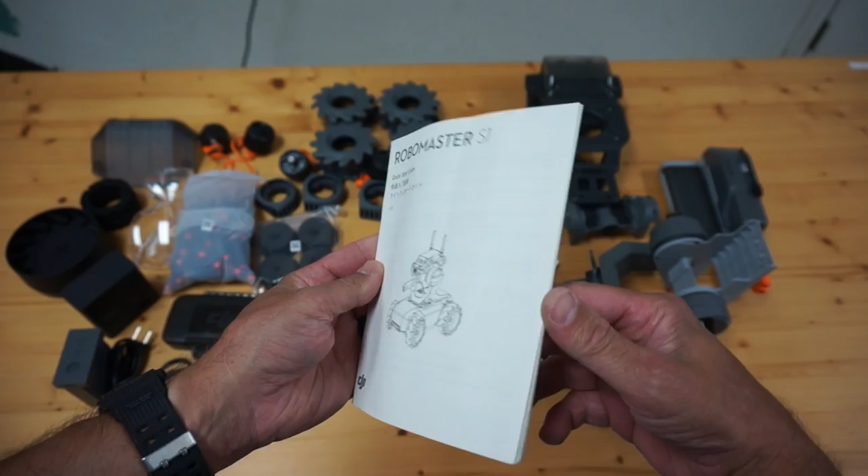We're going to go through the assembly using this RoboMaster S1 book. There are actually 72 steps, I believe, maybe 73. We'll see how that goes, but let's go ahead and begin the build.

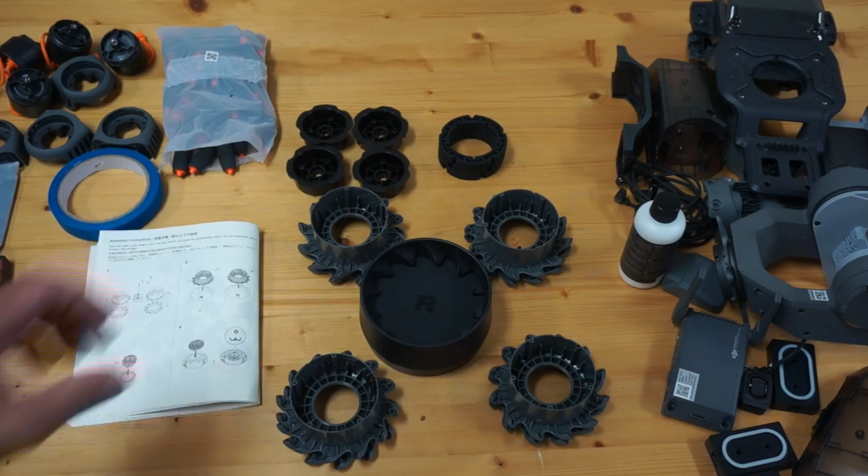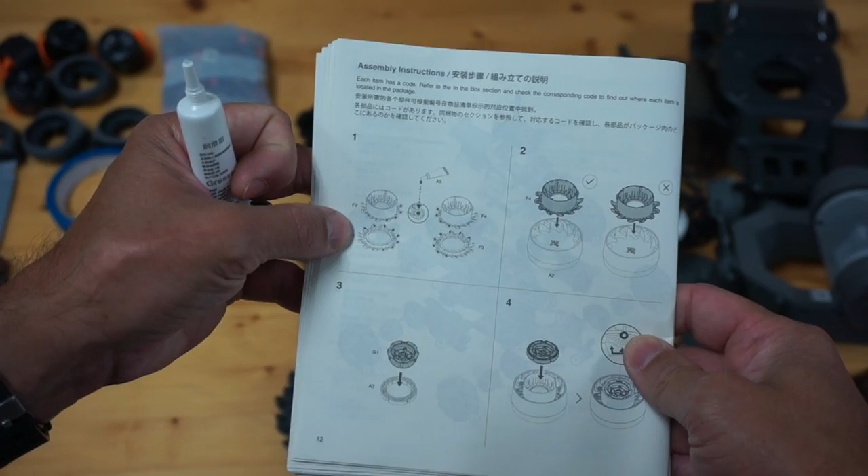The first part of this assembly is focused on the wheels—steps 1 through probably 12 or so pertain to wheel assemblies. For the sake of not being redundant, I'll just focus on the left and right wheels. This is a left rotating wheel and this is a right rotating wheel. For each wheel there's an inner and an outer hub. Step 1 is focused on putting grease in each one of these hubs. There are a lot of little holes, and the wheel rollers, which are essentially like bearings, will go in. We want just a little bit of grease in each hole.

Okay, so I have everything greased up—you might be able to see a little bit of grease in each one of these holes. There are, I believe, 12 holes per hub. Each wheel has 24, and if you do all 4 wheels, that's 96 little dabs of grease you'll need to do. That's step 1, and it should take anywhere from 5 to 10 minutes.

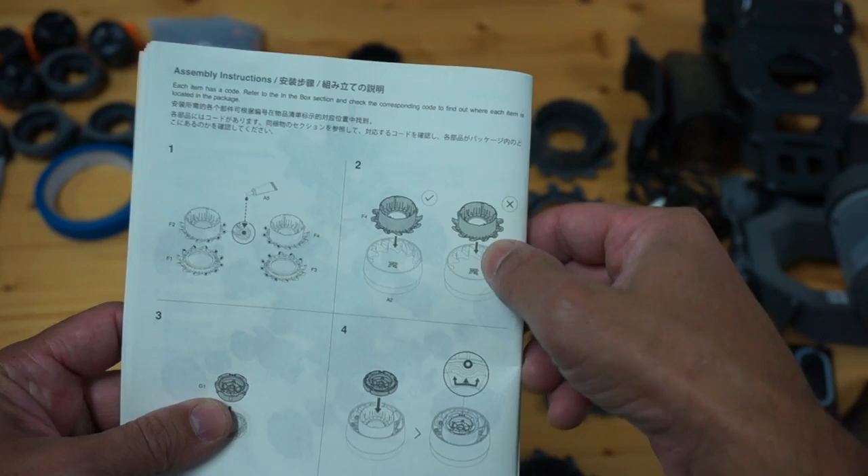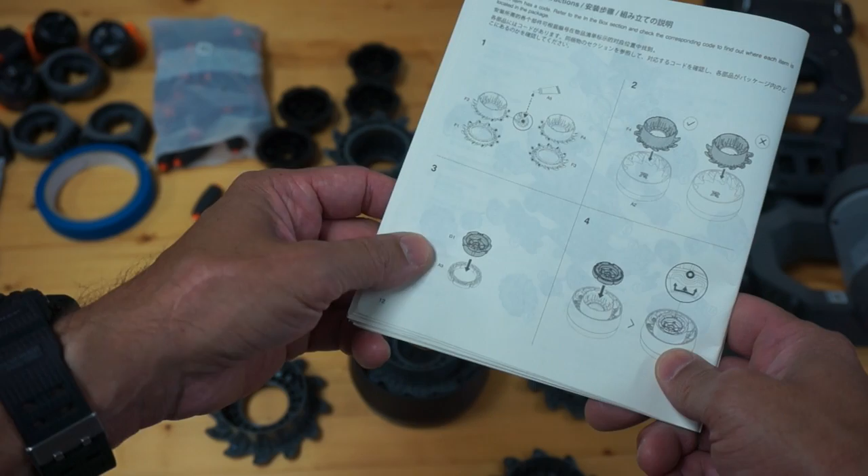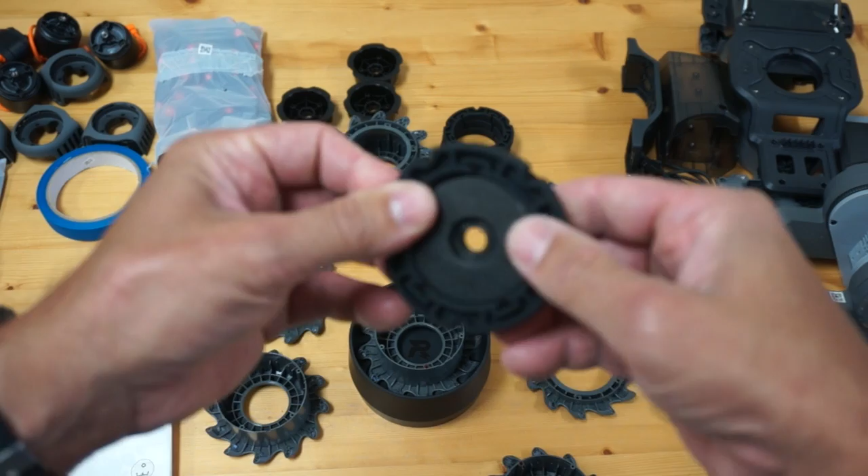Step 2 has us inserting one of the hubs inside this container, which will help us build the wheel a lot easier—that's the left side, that's the right. I'll go ahead and grab the right outer hub. That's done. Next, in step 3, we get what I believe is sort of a damping system—there's this rubber O-ring that goes with the hub. I'll grab one of these and one of the rubber gaskets or O-rings and slide that on. It looks like there's a certain way to slide those on—you can see the little notches there.

Now step 4 has a bit of a callout here. If we take a look at our hub, there's a red dot right here, and when I put this in, we can see this arrow symbol. So we want to make sure that arrow lines up with the red hole.

You can see all of these others are not colored, but this one is red. So that will complete step 4 for this right wheel.

We're going to go ahead and insert our wheel rollers. Now that's where the grease comes in handy. If you look at these rollers, there's little pegs on each end. So what I'll do is set one in, and we'll go all the way around the hub and insert those.

Okay, so we have this first right wheel with all of the rollers installed. I believe there are 12. So we'll go on to, I believe, step 6, and that shows that we're going to put the other side of the hub on.

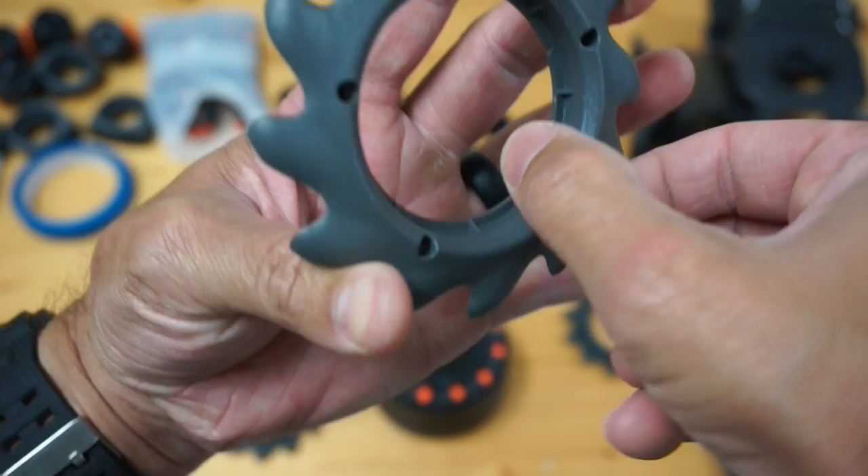So I'll go ahead and grab one of these right hubs. Once again, I've gone ahead and greased that up. And there is another call out in the instruction sheet. If we take a look, you'll see a little bit of a notch at the top, that little triangle. So what we're going to do is line that up with the red dot. We put that O-ring with that arrow lining up with the red dot.

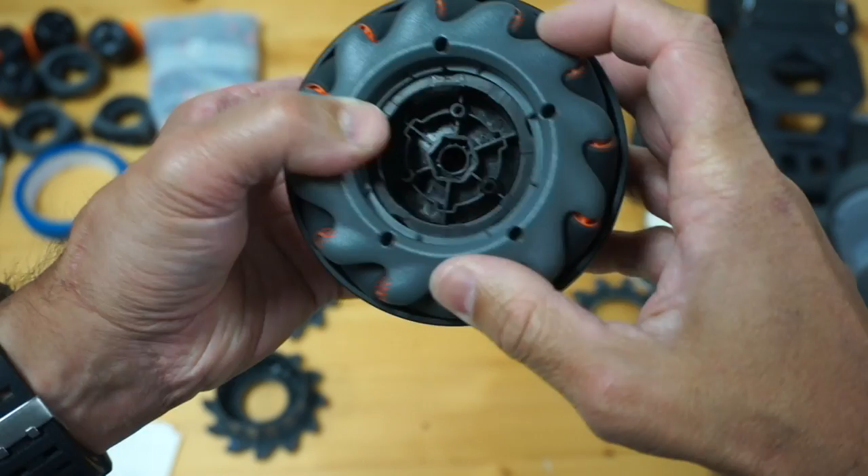And now I've gone ahead and lined that notch up so that all of the wheel rollers are inserted, ready to go for this right wheel. And then what we'll do next is actually put these screws in.

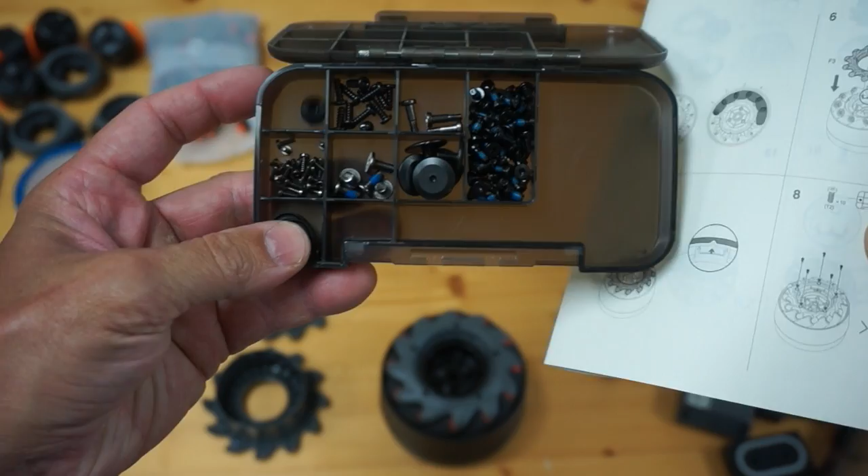So step 8 has us getting these T2 screws out of here. See our screw container. If we look at the actual instructions, it actually shows us which compartment within this container to use. So this compartment, I believe we're going to use 5 of these for this right wheel, so I'll go ahead and put those in.

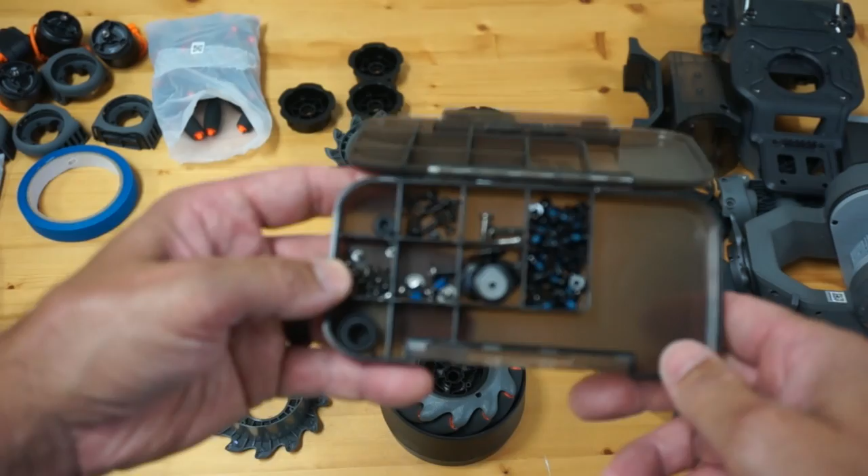Okay, I have everything screwed in. Let me share an added plus: this DJI screwdriver is magnetized, which is incredibly helpful. And I've gone ahead and added the 5 screws in here.

Pull out this wheel. Once again, this is the right wheel. And what we'll do next is we can flip this over. This side with the R, the RoboMaster logo, is for the right wheel, and we'll flip it over. And then I'll do the left wheel.

Our wheel assembly is complete. We have 4 mecanum wheels. Now, if you're not familiar with this design, it's very common in robotics. These wheels will allow us to move in an omnidirectional manner where we can move sideways, forwards, backwards. They're actually really cool. And just as a side note, we have some extra rollers. So I was concerned at first that I didn't have all of them inserted, but DJI provides a couple extra.

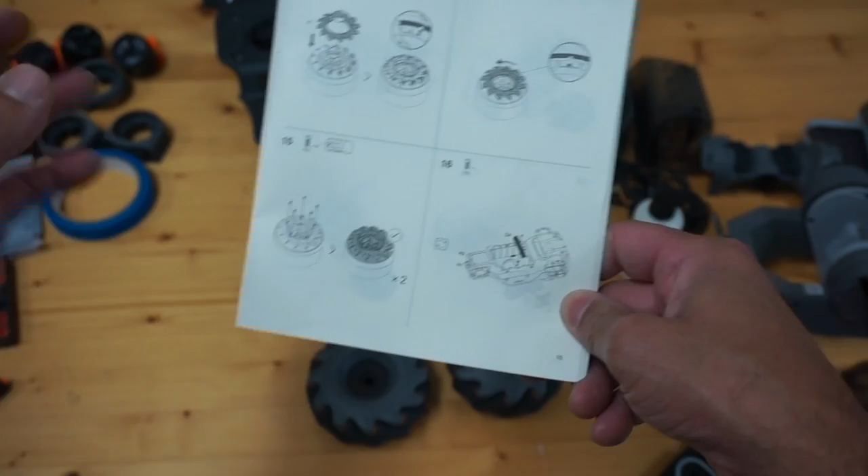That covers the first 15 steps. That might take you 30 to 45 minutes to assemble the wheels. And next it looks like we're going on to doing some frame or chassis assembly.

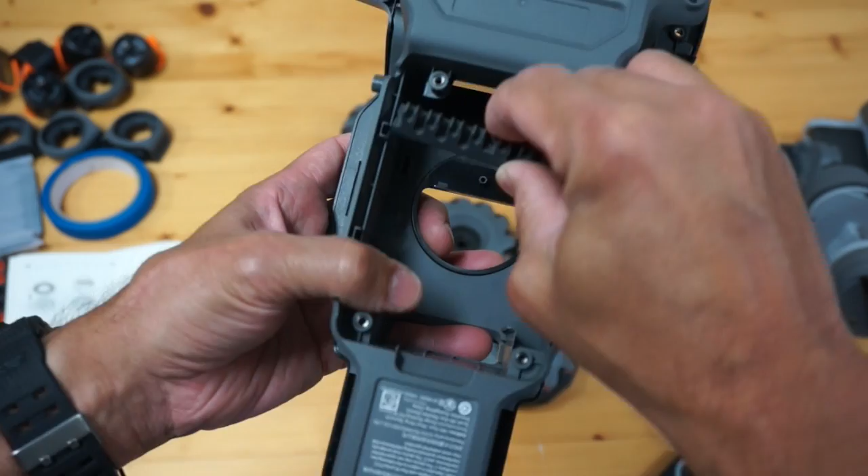So step 16 looks like we're just inserting a cable tray inside the bottom of this chassis. So I'll go ahead and take this tray. It's going to just slide right in and then snap into place. We'll put a little screw in there, a T2.

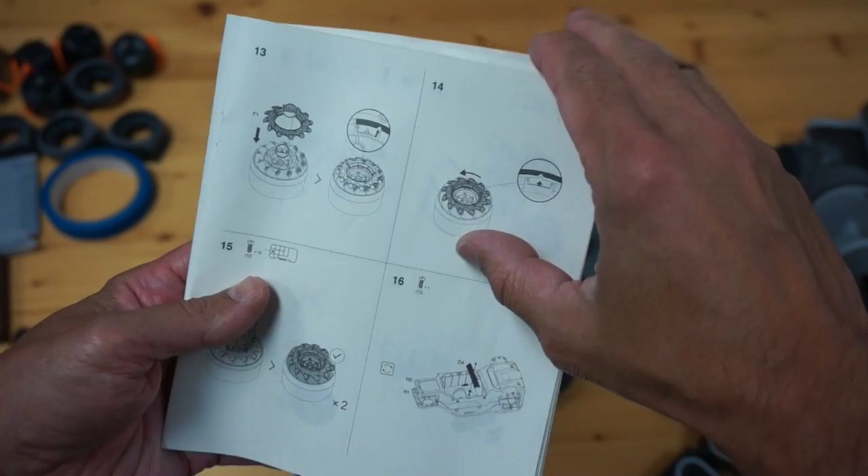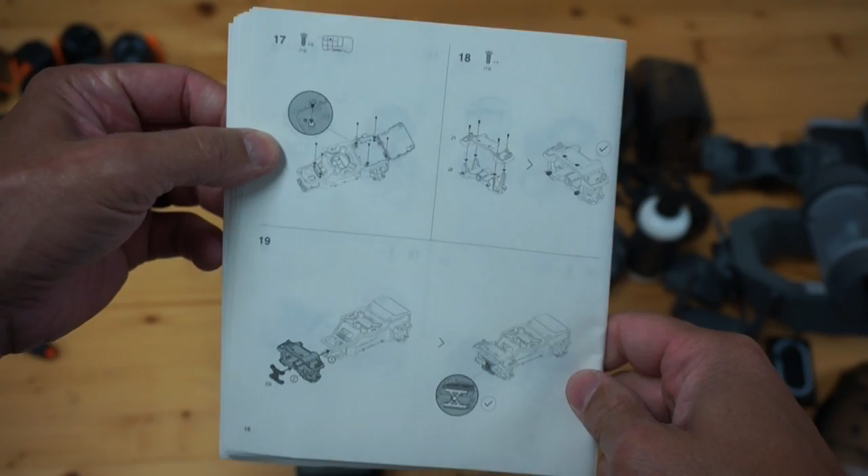Okay, step 16 is complete, and if you haven't already noticed, these instructions are very similar to what you'd see from IKEA, which we've all probably had our frustrations with, but so far these DJI graphical instructions have served me well. So it looks like step 17, we're going to be putting 6 screws in this chassis assembly.

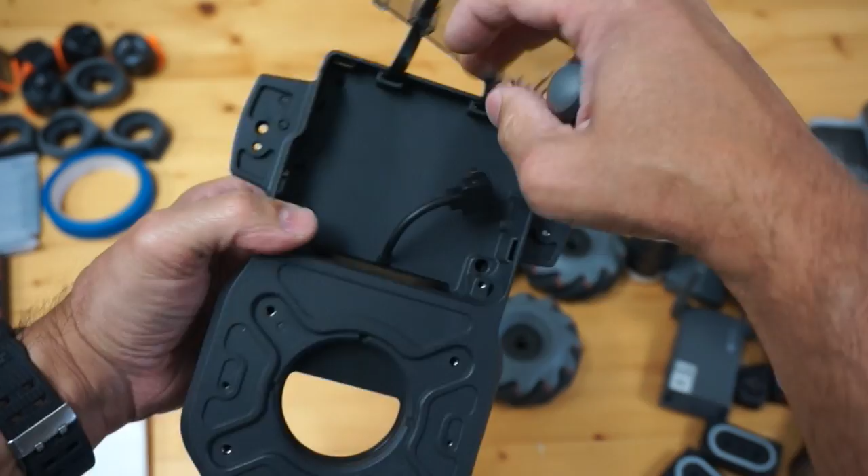See here that it's not completely assembled yet, so we'll snap those together and put in these 6 screws.

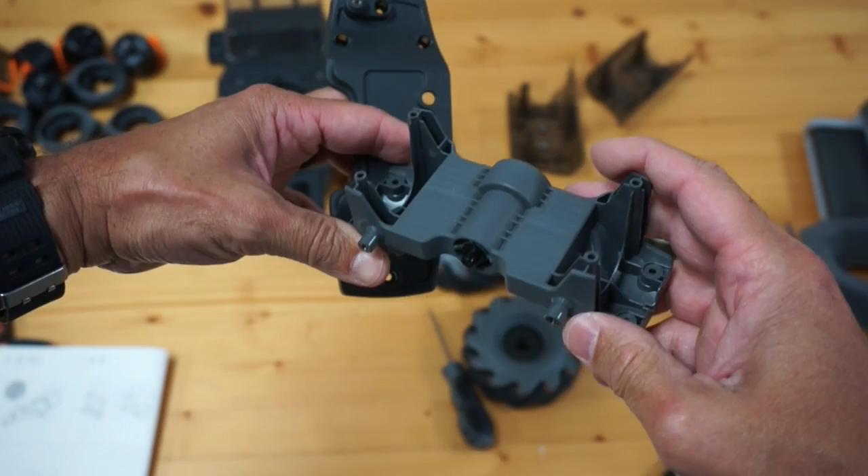Okay, moving on to step 18. This is the front axle assembly. So we're going to be screwing those 2 pieces together. I want to make sure I can tell by the drawing that we want these 2 knobs sticking out, and then we want these 2 threaded holes in the back. So we're going to assemble it this way, using these 4 T3 screws to assemble it.

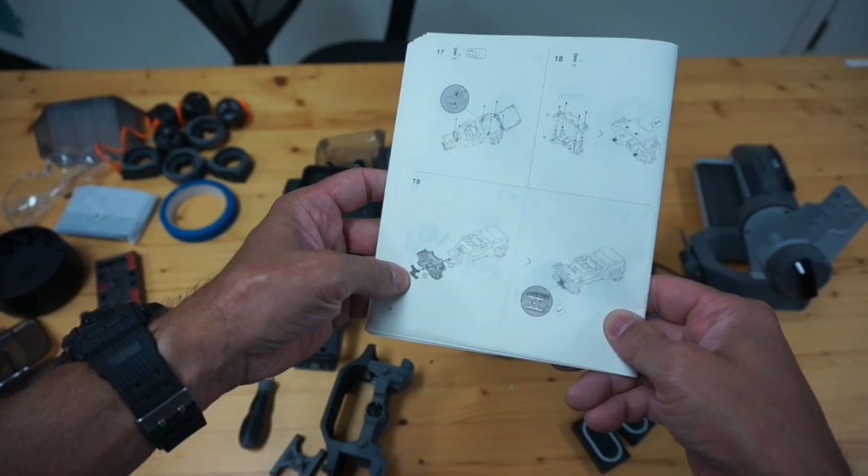Steps 19 and 20 consist of taking that front axle assembly we just put together, this middle chassis, and this piece to hold it together. So what we'll do is, looks like, see this hole down here? You can see part of this axle sticking out, so we're just going to make sure we insert it in there.

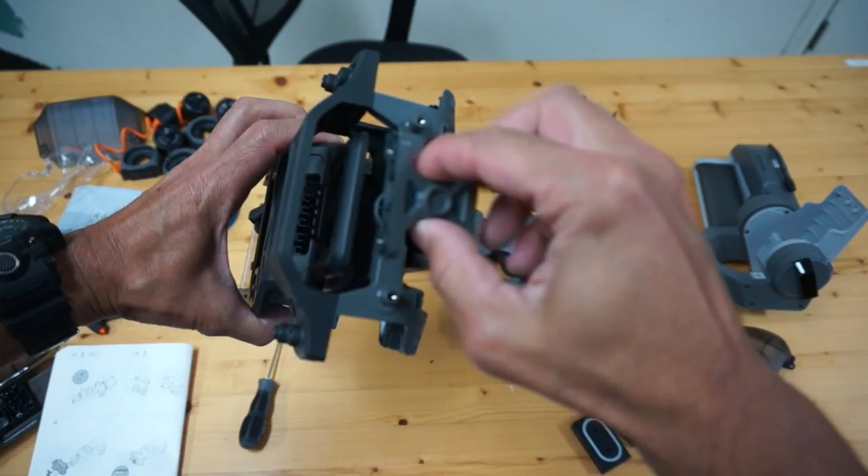And then we're going to take this last piece that looks like an X. We're going to slide it in here. You see this hole? It's going to go on the other side of this axle. It should just hopefully snap into place. Okay, now what we'll do is we'll go ahead and add the screws.

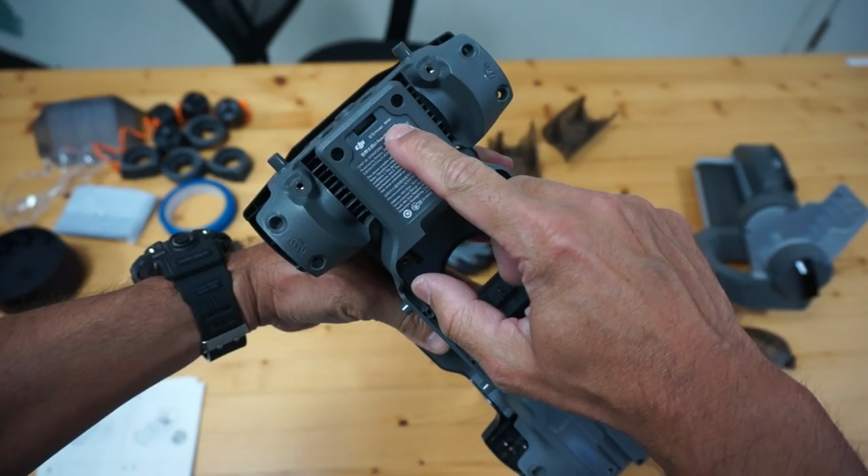So our front axle assembly is installed. Let me just make a side note to be careful not to over tighten. This is all plastic, so you don't want to get too tight. Just get it to where you can feel a good bit of resistance, to where it almost stops, and then just leave it there.

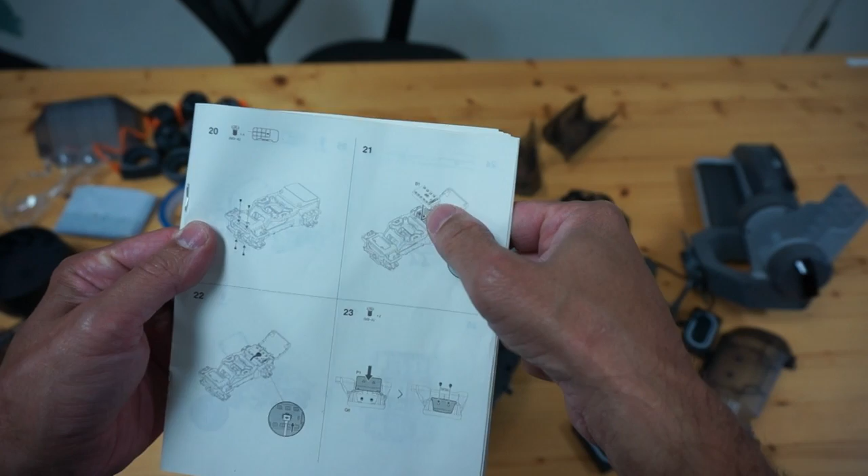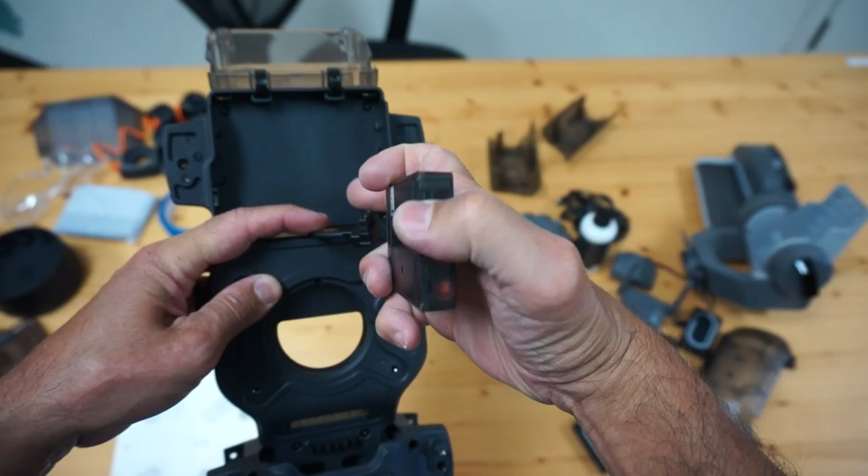Okay, so now we're moving on to step 21. Looks like there's a nice, for lack of a better term, power distribution board where we're going to plug everything in. So it looks like we're just going to snap it into place in the chassis. So I'll go ahead and grab this. Looks like this is going to go on my right side. If you look underneath, there's these notches here, and down here there are notches as well, so should be able to just hopefully click this into place.

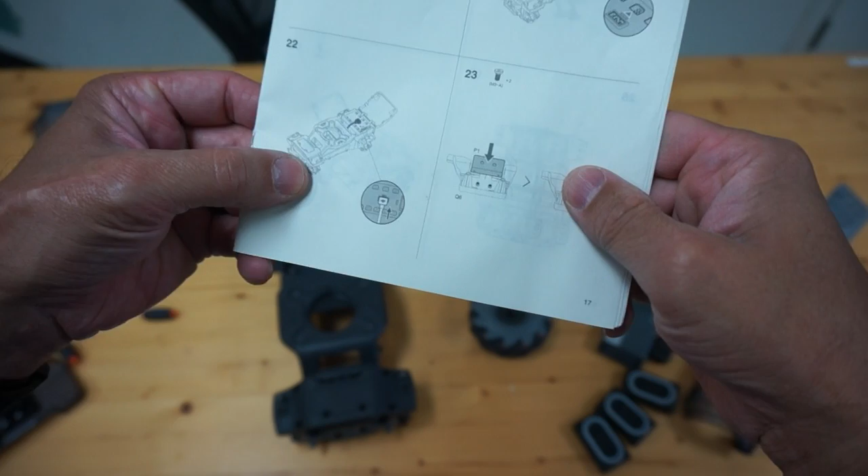And it looks like step 22 is just connecting our main power from the distribution board to the rest of the robot. So go ahead and take this connector and plug it in.

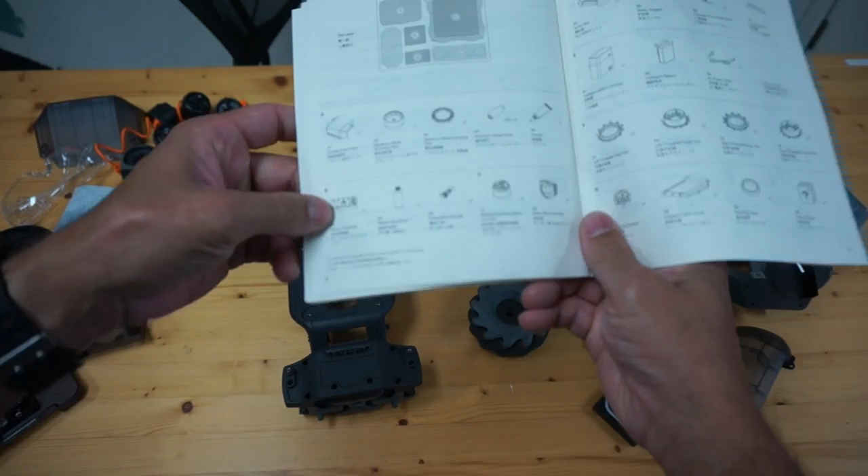Let me make a quick correction as it relates to this component right here. I was actually looking in the manual. You can see all of these components are labeled. That's not a PDB. It does handle power distribution, but DJI calls it the motion controller. So that's just for reference.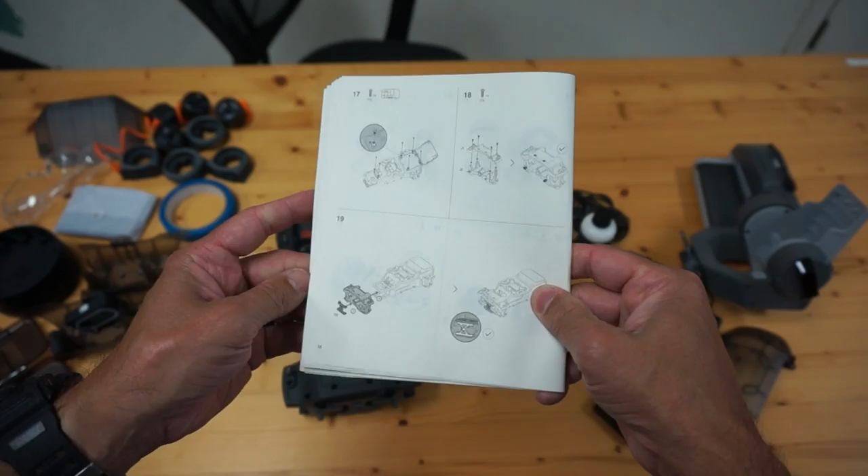Okay, let's move on to step 23. It looks like this is, they call it, the left armor for the chassis and a hit detector. This RoboMaster S1 comes with 4 hit detectors, and this is the left armor. So what we'll do is, you can see these cutouts, we're going to slide this in so that we can run our cables into it. That snaps into place, but it also looks like we're going to add 2 M3 screws to this.

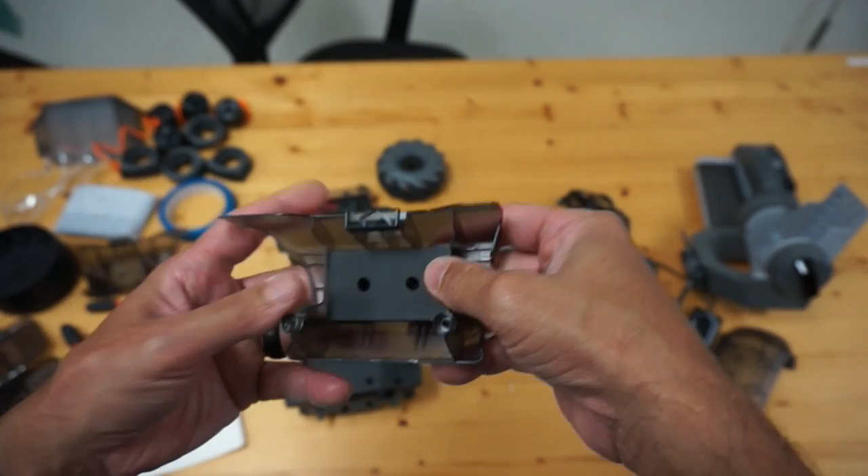Okay, now step 24, it looks like we're going to do some wiring of that hit detector. It says we're going to use this, quantity of 1. You can see there are 3 different lengths—a short, a medium, and a long cable that comes with the kit. So looks like we're going to use the medium. I'll go ahead and pick this middle one out, and we're going to go ahead and plug it into this side of the hit detector.

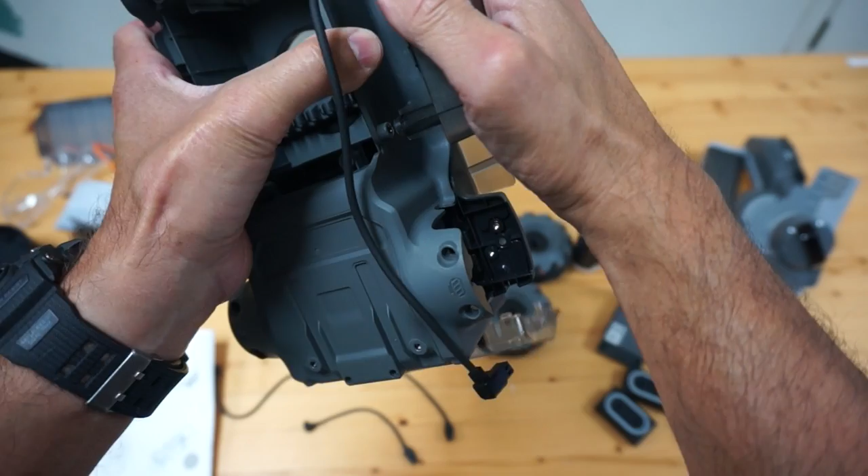Looks like in step 25, let me flip this over. Looks like there's this notch up here. Go ahead and click that in, snap that into place, and it shows in step 26 running our cable through this notch. So we have this little notch here, which is handy. Go ahead and run it through there, and then I believe we'll just feed it through here to the top.

And now I see where this cable retainer or tray comes in handy. I'll just snap that into place, flip it over, and it shows in the diagram that we want to go into this port—it's CAN bus. So good length, not too much slack.

Okay, now it looks like we're going to do the other side. So I'll go ahead and grab one of these hit detectors, go ahead and snap it into place, screw this in. I'll go ahead and grab my other medium length cable, plug it in here, snap that into place. Make sure the cable's on the outside of this, where that screw goes in, and snap that into place.

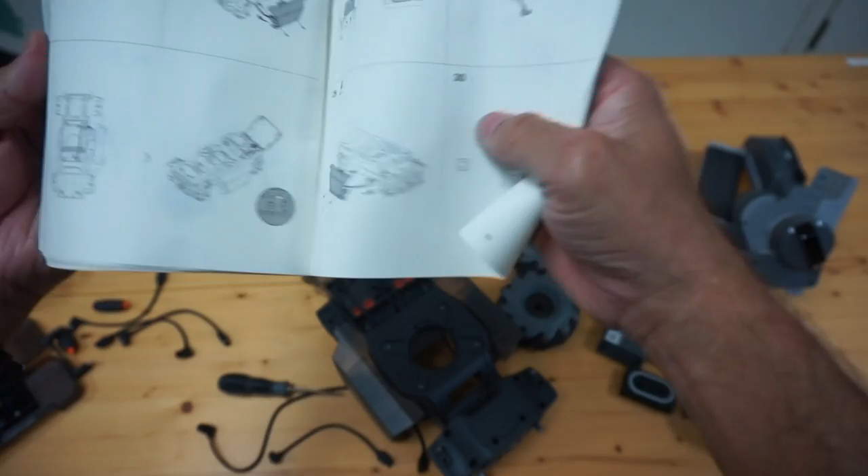Feed it up through to the top compartment, and let's see where this needs to go. Step 31, so it shows us in the top left. Go ahead and run this right here. And let me just double check to make sure that I have both plugged into the right place. Shows us here, right here for the left side and here for the right side. So everything looks good so far.

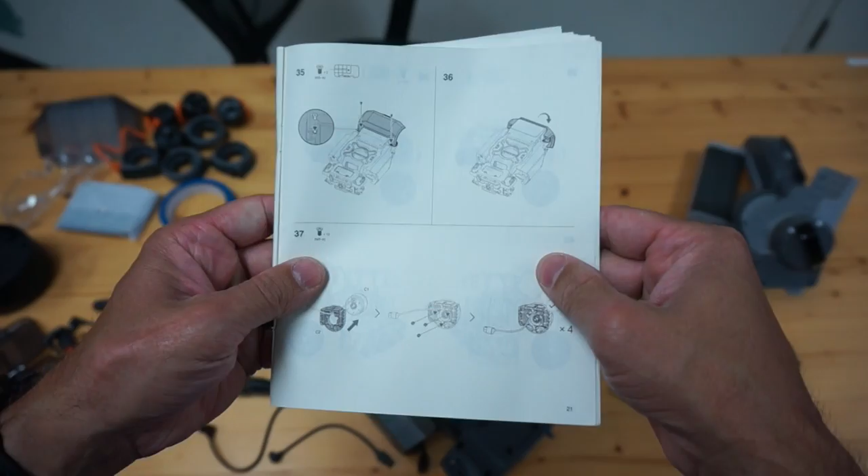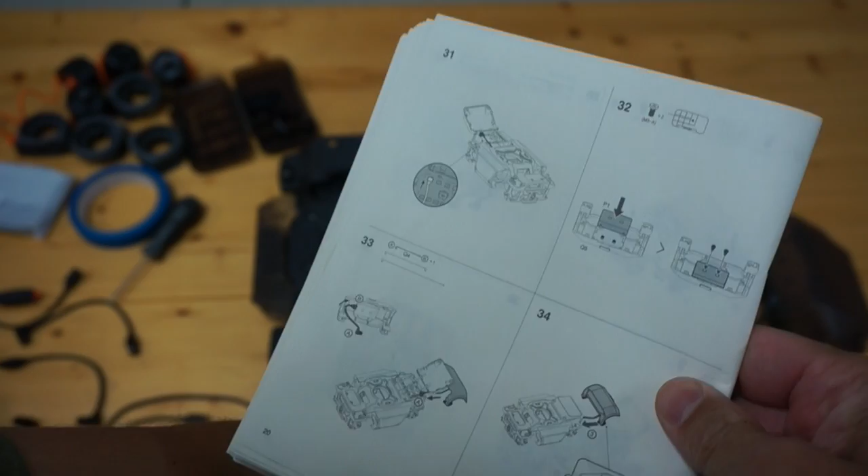Let's move on to step 32, but let me mention real quick—I forgot to mention this in the previous section—that I did screw this chassis armor in place. I forgot to do that, so just added 2 screws here and 2 on this side. Now we're going to go to step 32, and we're going to put a hit detector on the rear chassis armor. So that's this piece here, and as with the other pieces, we're going to go ahead and just snap that into place.

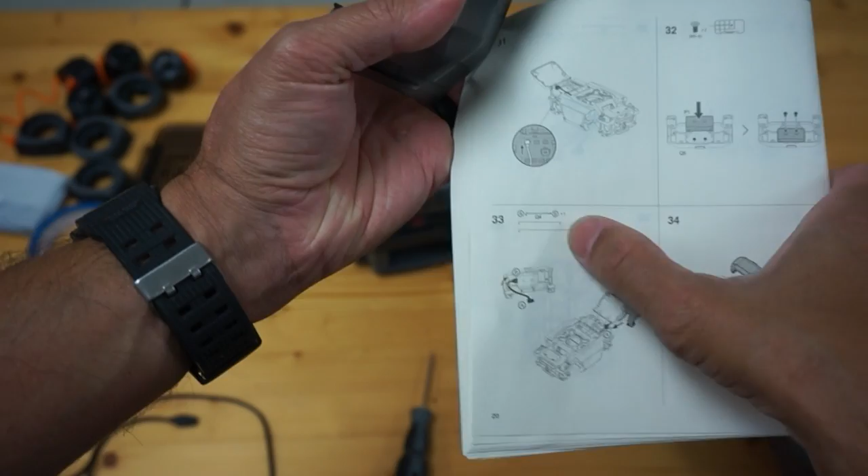I'll go ahead and screw this in. It shows that in step 33 we're going to wire this up, using one of the short cables. Let me grab one of those. It looks like we attach that to this left side here.

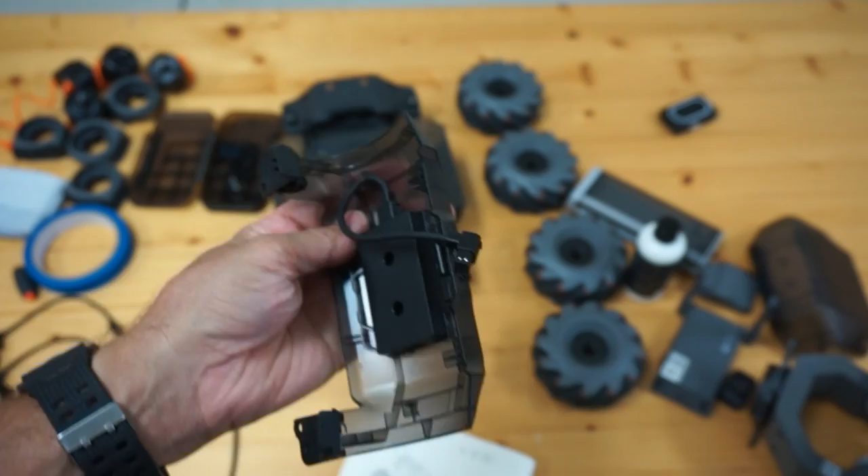Step 34 has us running this cable from the hit detector. We'll go ahead and clamp it in using this built-in clamp. Now we're clamped, and we're going to go into this plug here. According to step 35, we'll mount these screws in. Let me go ahead and close this.

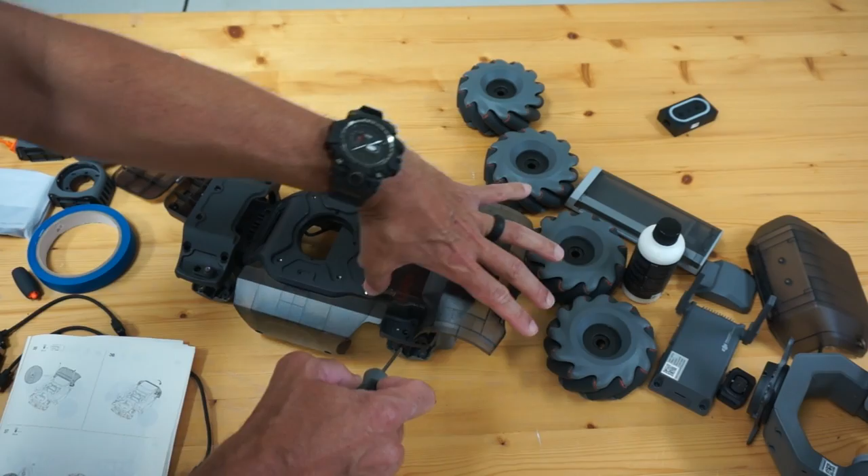You can see that this cable is going to run through this slot right here, so make sure we go over that. Once we mount that, we'll be able to use it since this is spring loaded, it'll go back and forth. I'm going to put that in place and grab a couple of these M3 screws. Rear armor's in place, now we can just snap it down.

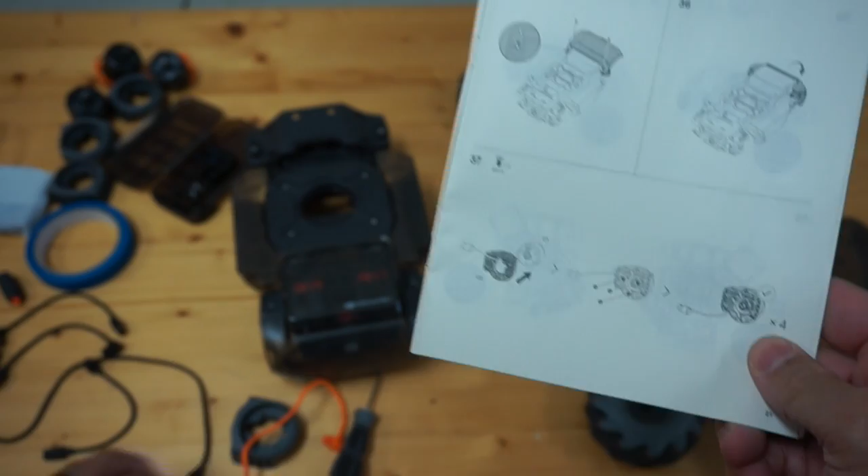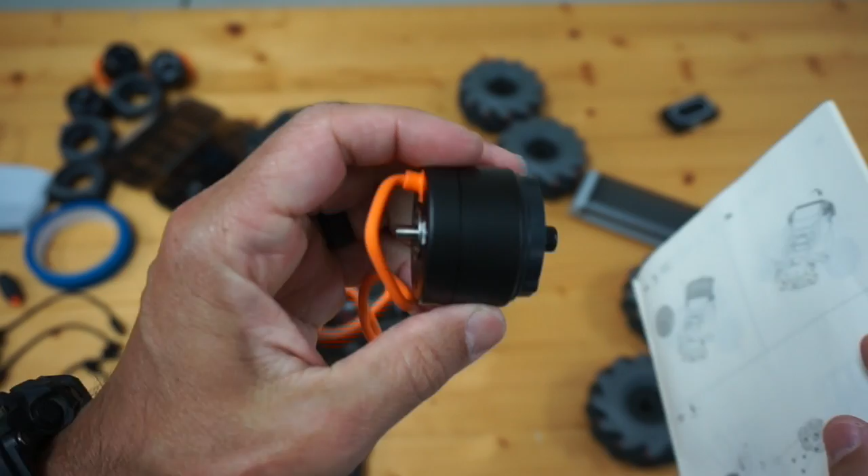It looks like step 37 pertains to our 4 motors. Let me grab one of these to show you this in detail. It's a brushless motor with built-in ESC, and I can't tell you just what high quality this seems to be. You can see on the other end just a simple connector like the others.

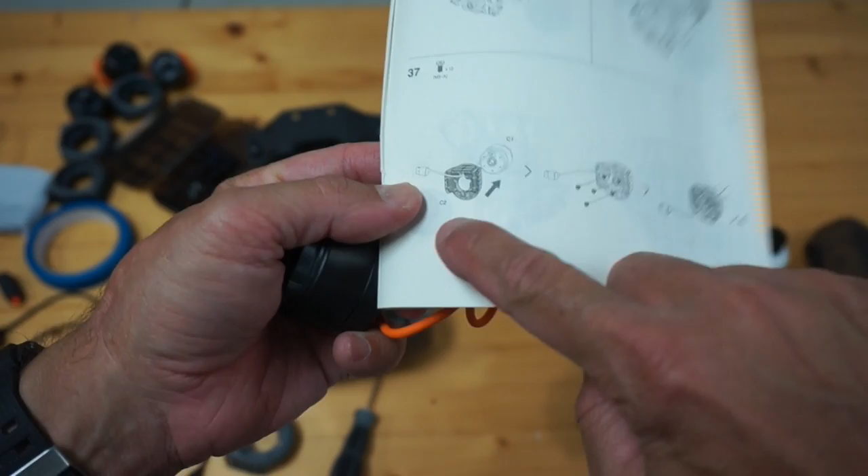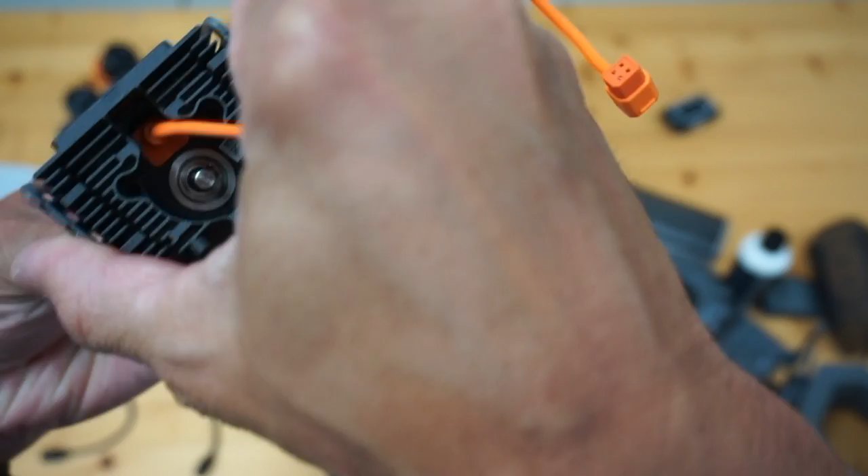In step 37, we're going to take the motors and install them to the motor mounts. There are 4 mounts. I'll do one of them, dropping this connection through here and pulling it through. You can see where it goes into the motor, and then we use that little cutout there to feed the motor in. Looks like we're going to mount 3 of these M3 screws, and I'll do that with all 4 motors.

Okay, I feel like I needed to sit down for this next step. We're going to wire some of these cables through for these motors. Steps 38, 39, and 40 consist of taking the motors we just put the mounts on, starting with the front left motor. I need to run this cable through, so I'm going to drop this cable in here.

Hopefully you guys can see this - there's a little hole, if I can get this up through there. I'm running the cable through the hole. I'll go ahead and slide this motor in for now, that's just going to lock into place. You can see here our little cable tray. I'll mount this motor according to the instructions, using 3 of these M3 screws, hopefully getting it nice and secure.

Then I'll flip this over. We have 2 holes on the top, or on the bottom I should say. Now with that motor secure, we're going to connect it, and judging from the instructions, this front left motor is going to plug into this slot right here. These cables are all just about the right length, there's not too much slack, which is great. So there we have the front left motor. I'll fast forward as I do these other motors.

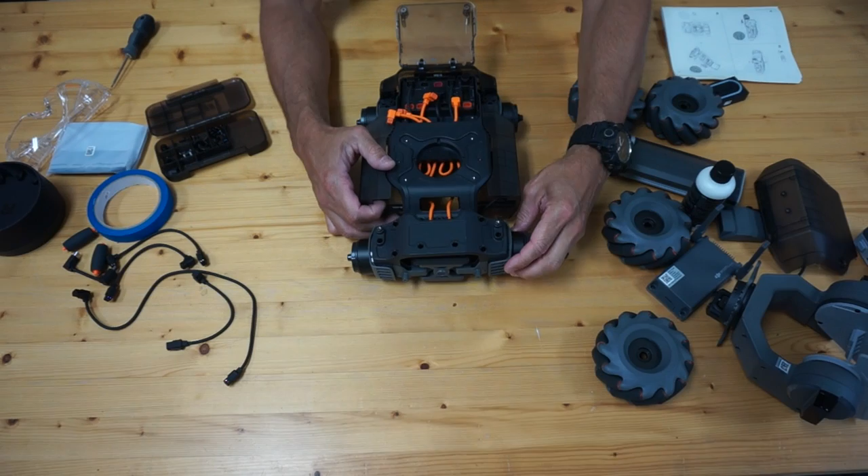Now I'm going to wire everything in, trying to do this inverted so you guys can see. Once again, we've already taken care of this front left motor, now we're going to do the front right. I have that cable coming out here, coming through to this port here, so I'll go ahead and make that connection.

Now let's take care of our rear left wheel. Looking at the instructions, step 44, with the rear left wheel, we're going to cable it up. We've already done that, and it looks like it's going to go on this far right side. You can see that these actual cables and ports are color coded, so that's helpful. I'm assuming, let me just double check, our rear right wheel connects to this port right here. Now we have our motors all connected and wired up.

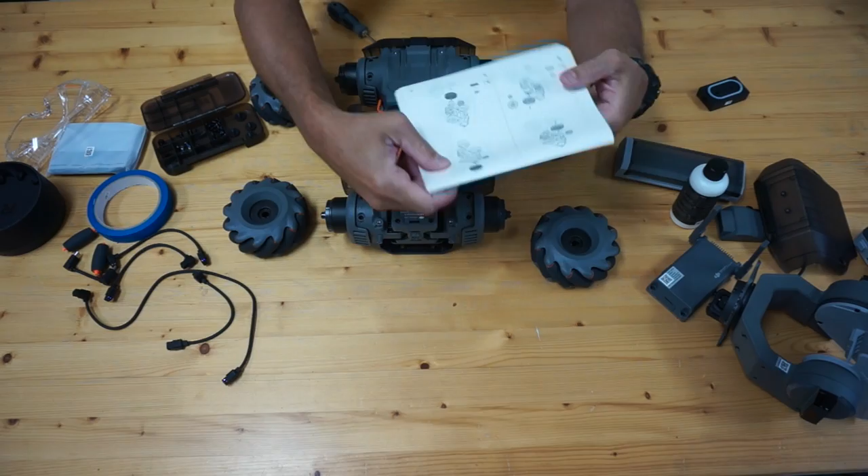It looks like step 50 through about 52, we're going to be mounting the wheels. Let's go ahead and do that. Now, let me show you guys this, hopefully you can see it. Next to each wheel on the chassis, there's a tread pattern, very similar to a multi-rotor where you have your two opposite rotors spinning in the same direction.

That's similar to what we have here with these motors. What I'm going to do is line these up, and this pattern is going this angle, so we know that this is the right wheel for this motor. Same here, so it looks like I have everything lined up. This one's going this way.

So now we'll go ahead and mount these. You can see there are 3 holes in this motor, and we have 3 little pegs. What I'll do is make sure I get the right one on there. Sorry, this is a little backwards. I'm just going to put it on there and spin it a little bit till it falls into place.

So we have these fat-headed screws that I'll go ahead and put on, and we'll do that for each of the motors now.

And real quick before we move on, I just want to demonstrate this mecanum wheel design. Pretty genius, but you can see how it's real easy to spin and move horizontally as well as forward and backwards.

It looks like the next sequence of steps, 53 through about 58, have to deal with the front armor for the chassis, installing the hit detector and wiring it to the motion controller.

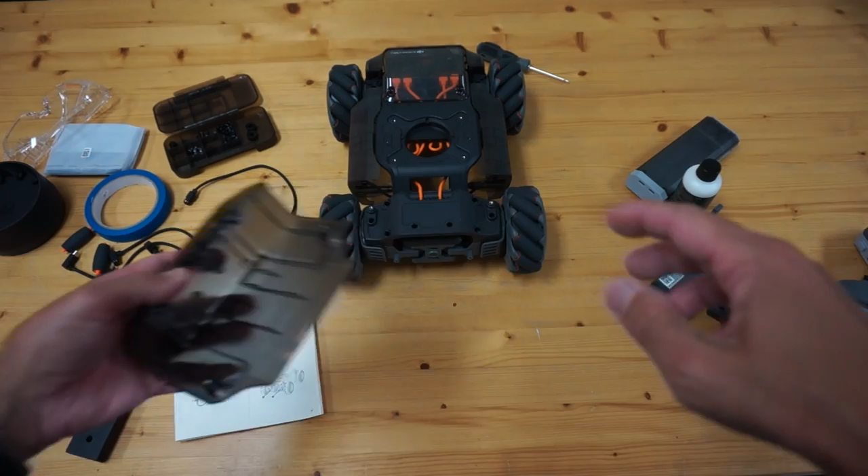Now, if you've kept count so far, this is our 4th piece of armor with our 4th hit detector, so it looks like we have hit detection from all 4 sides. I'm going to go ahead and click that into place.

56 and 57 look like we're going to use this long cable finally to install this front armor. We'll go ahead and wire it through, and we'll use some screws up top and in front.

Let me just make a quick side note that these front screws are not your typical ones. These are a little bit longer, still M3, but longer so they can fit in this front chassis.

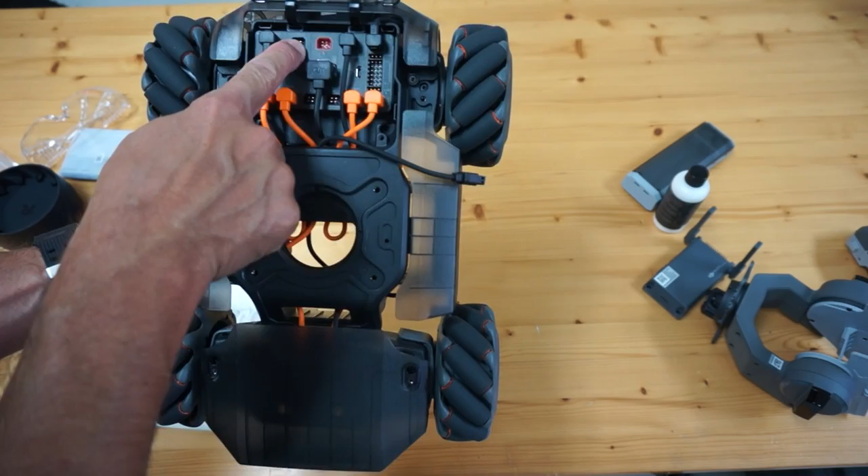All right, step 58, armor's mounted. Let's go ahead and plug it in. It's going to plug into this port right here. So I'm going to get that in the right spot and plug it in, and maybe pull the slack back just a little bit.

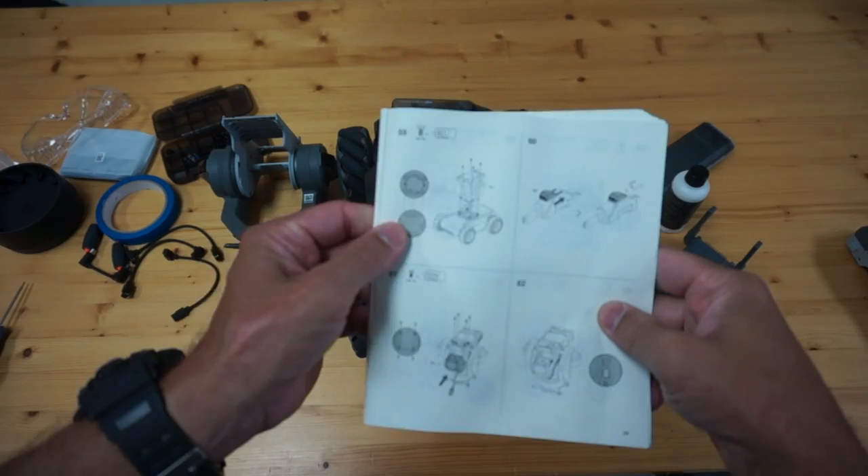So now that hit detector on the front is wired up. Step 59, we're going to install this heavy duty gimbal.

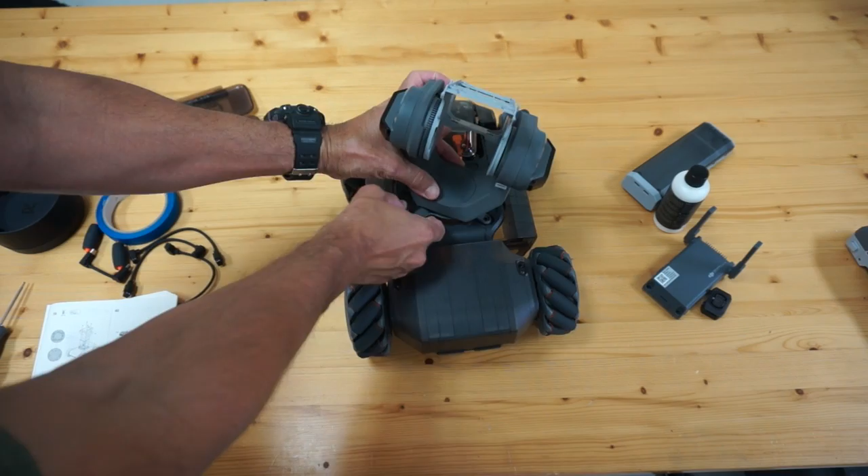So you can see it here. And now, judging from the instruction manual, we're going to want these 2 ports up front, so make sure you keep that in mind. So you can see I can put it in place. I'll flip it over, and you want to make sure that those 2 are exposed so that we can cable them into the motion controller.

So what I'll do now is it looks like it takes 4 of these M4 screws. Those are a little bit more heavy duty than our previous M3s.

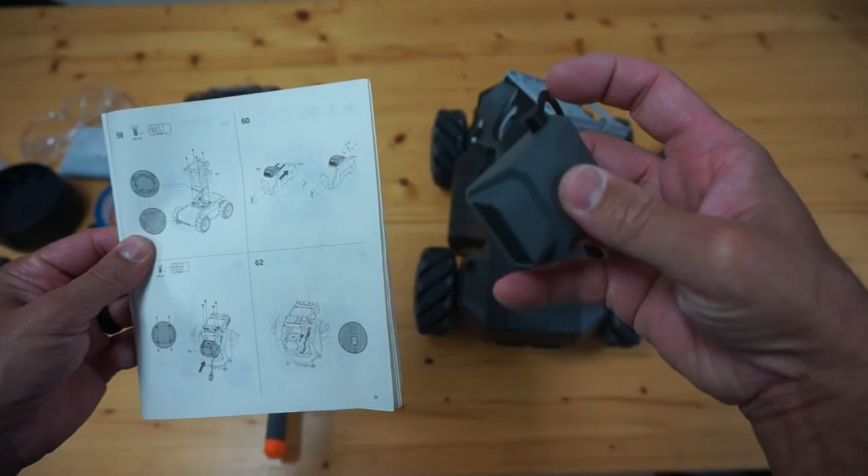Okay, it looks like step 60 may be the easiest of this entire build. We're going to take this speaker, which I believe puts off all sorts of sound effects when the blaster or the cannon is going. Slide it on.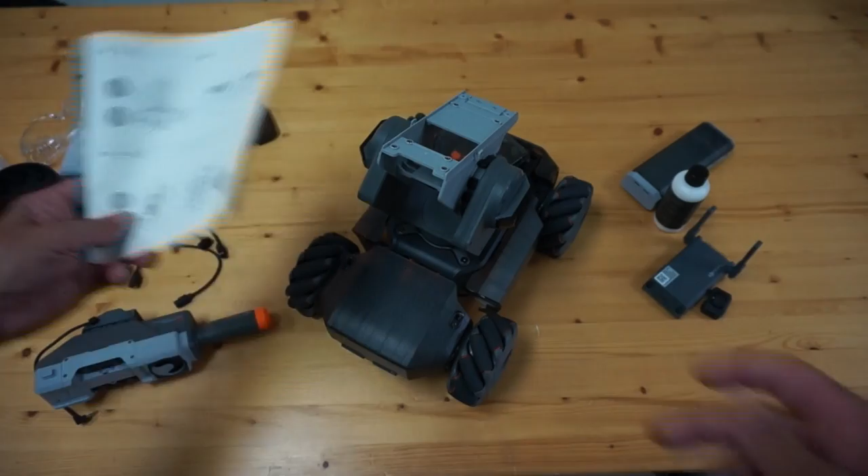Okay, step 61, we take our blaster and we mount it to the gimbal. So I'm going to try to do this for the photo. Looks like the blaster, I guess we'll put it with the speaker facing down in here.

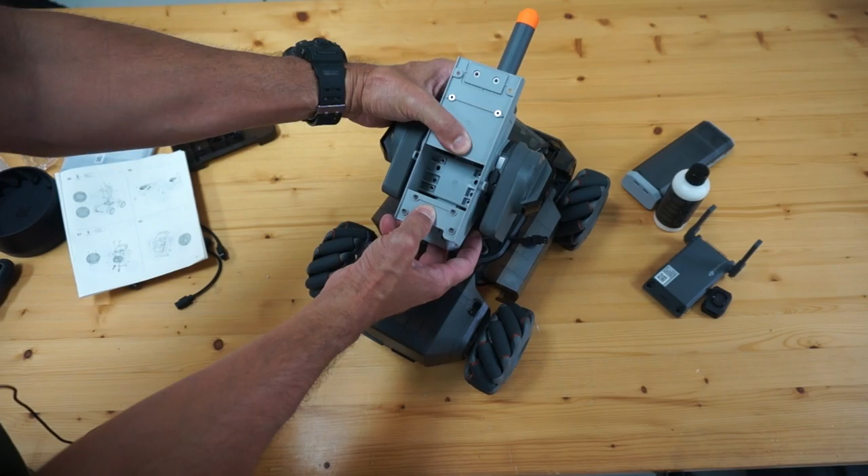And you can see hopefully that these holes right here line up. There are 4 holes. Go ahead and use whatever screws necessary. It looks like the M3 screws to get this mounted.

Step 62 looks like we're going to connect the blaster to the gimbal on this bottom port. So hopefully you guys can see that. So that's plugged in. Now this is coming off our speaker. Really not sure where that goes at this point in time.

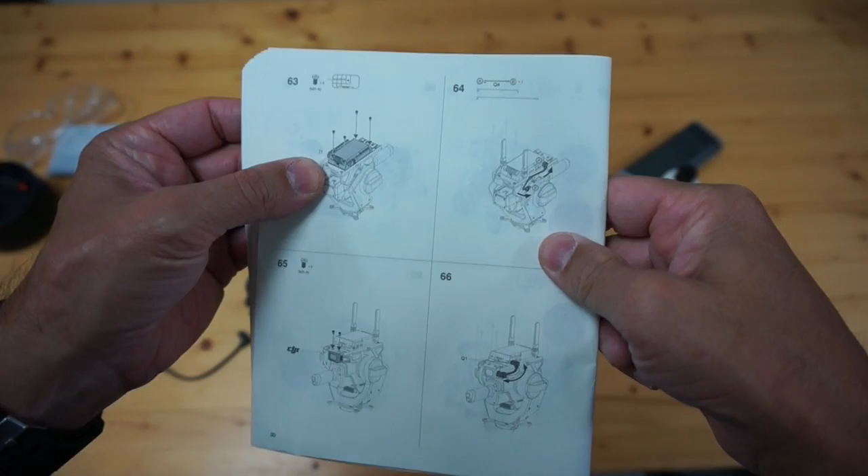Step 63 and 64 pertain to this intelligent controller. We'll mount it on top of the gimbal and then we'll wire it up. So see, there are 4 holes, and these 4 holes right here. Hopefully just set this in place, using these M3 screws.

And step 64 has us wiring up our intelligent controller to the gimbal. So we'll use one of our remaining short cables, connect it to the intelligent controller, and I'll connect the other end to this gimbal. Make sure that's nice and plugged in.

Okay, let's look at 65 and 66. Looks like a camera mount, and then we cable the camera to the intelligent controller. You can see this little camera from DJI, 120-degree field of view, f2.4, just tiny. DJI and their crazy cameras, but let me go ahead and get this mounted.

So we'll use the same M3 screws that we've been using throughout the build. I'm not sure which way, I'm assuming with the DJI facing up. Let me add another side note to this build: so far, I haven't found a case where any of the screw holes didn't line up or anything that caused frustration. I'm actually quite shocked so far at how well this build has gone.

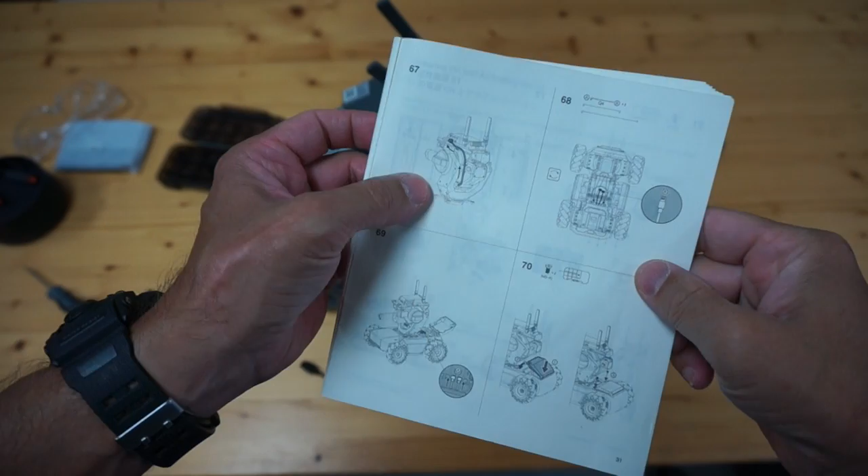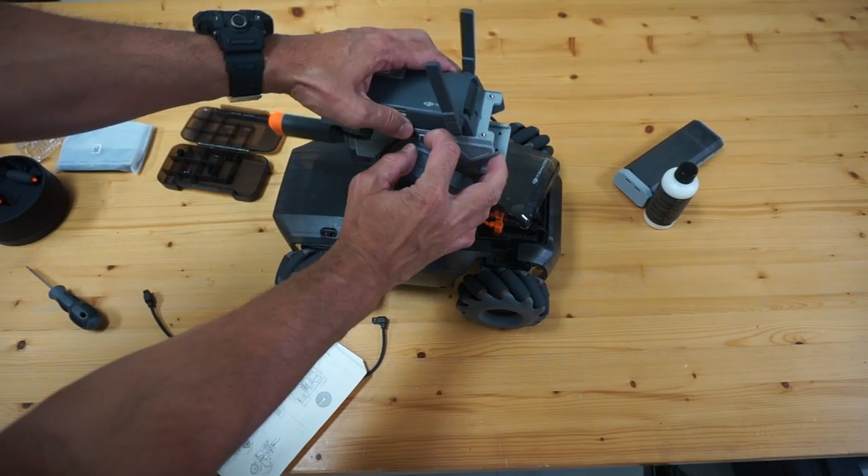67, finally, been wondering when this is going to happen. We're going to wire the speaker up to the intelligent controller. So we'll just bring it up here, put it in this little clamp, and then you can see this little hole right here for the speaker.

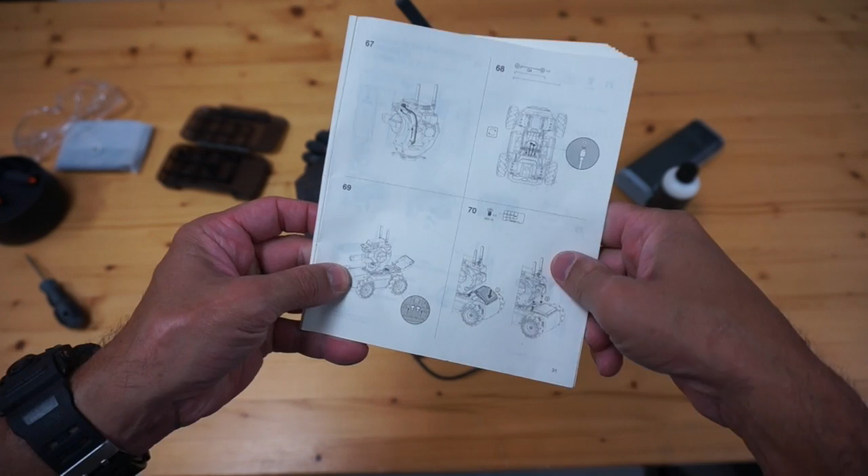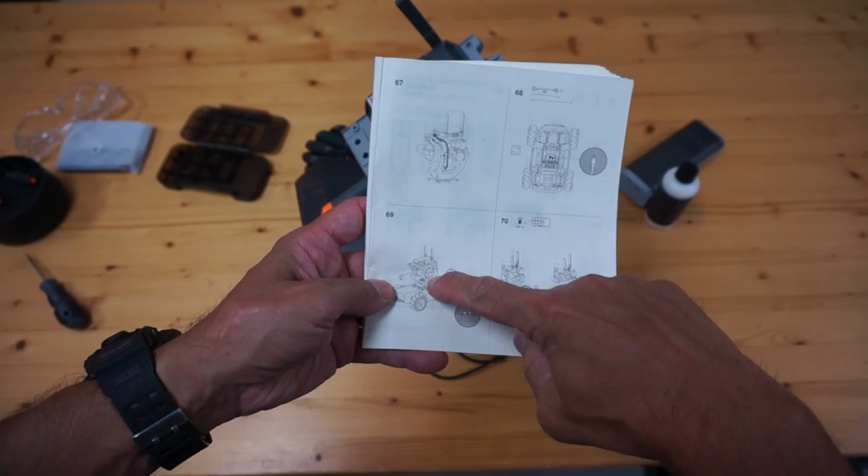68 and 69 pertain to wiring up this gimbal to the motion controller. If you recall, our intelligent controller, the blaster, all of that attached to the gimbal, but the gimbal is not currently connected to anything. So that's what this is for - hopefully I can flip this thing over. If you recall, these two ports.

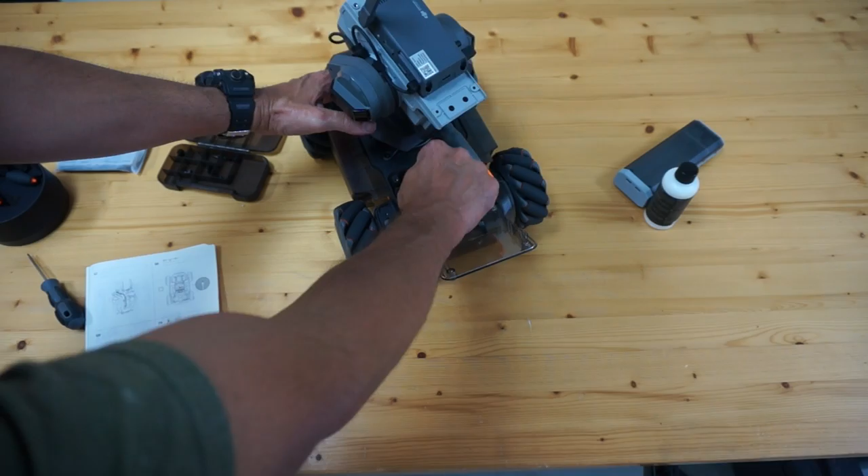So what I'll do is run the cables up through there, and run this one back up there too. To be honest, I'm not sure which cable goes into which hole, but I'm going to assume we just keep them lined up. So we can see here the cable on the right hopefully is going to go to this right port. Make sure I don't have these mixed up.

Okay, so those go straight down. They don't cross, and they go directly to each one of these in the gimbal. Hopefully I did that right.

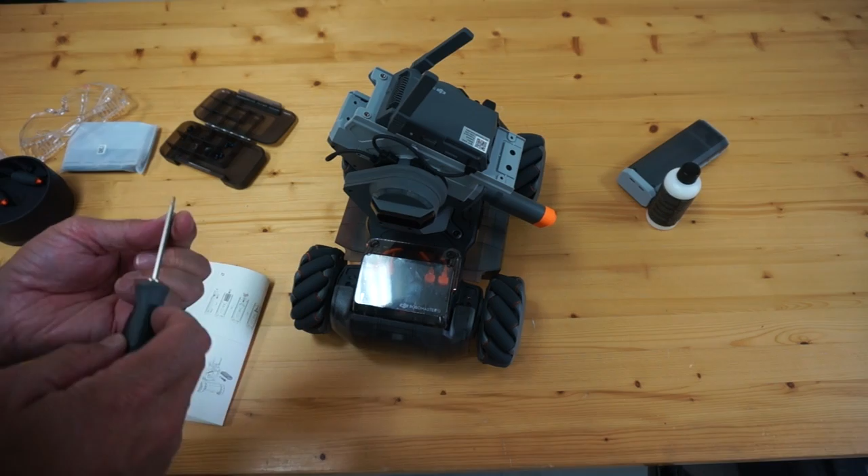Step 70 has me screwing this cable compartment closed, which is kind of a bummer - hopefully we got this connected correctly, otherwise we're going to have to undo this and get back in here. Cabling was, as you guys saw, pretty straightforward, so if anything needs to be changed, it's really not a big deal.

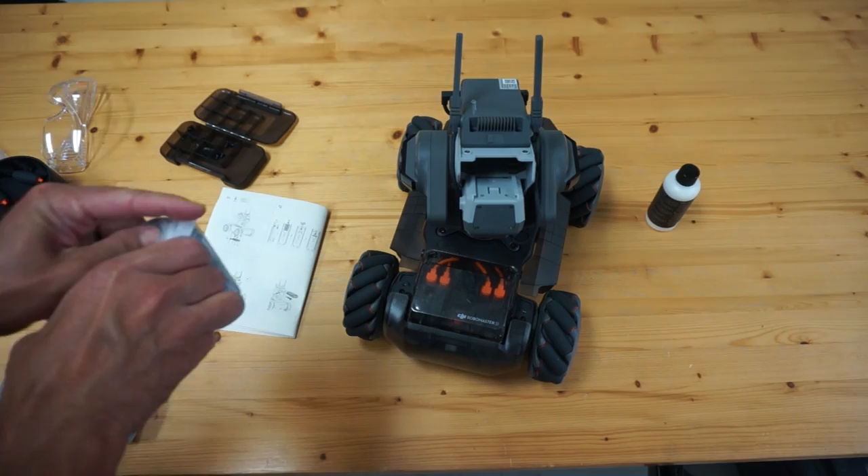Okay, looks like step 71 has us installing this plate. I don't actually know what it's called, but I'm going to take a guess and call it a skid plate. So we have it down here - looks like that part goes forward. So let me just flip this over. Really not sure how safe it is to set this upside down, or if I should just hold it in the air, but that's going to go on here.

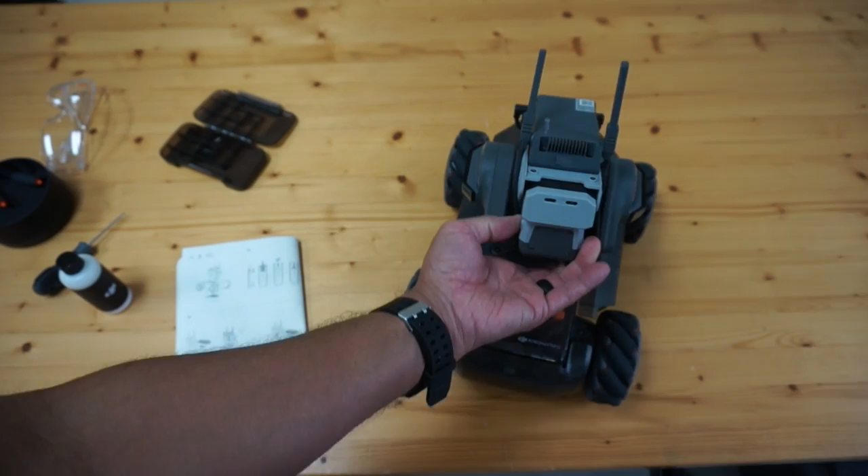All right guys, we're getting close. 72 and 73 are related to the gel bead container, which I did not soak in water - I'll do that another time. Hopefully you can go find a video that shows how this thing shoots, but essentially looks like you slide this down to lock the container. I'm going to slide this down, open this up, we'd pour our beads in and just slide it into this compartment. It clicks, and then it'll feed the gel beads to the cannon, and hopefully in the future we'll be able to do some autonomous Python code to shoot beads out of the cannon. So that's that, I guess that's all the steps. Now we just need to put the battery in.

Assembly complete. Now I was proactive and did charge this battery, so let's go ahead and put it in. I know I said this isn't going to be a cool video with all the fun driving and shooting, but let's at least see if we can power it up. The build went really well - no major issues there. Let me just set this down.

I think I just press and hold. Okay yeah, it looks like the S1 is doing some sort of calibration sequence for the gimbal. There's that infamous DJI jingle. So that's it, that's the assembly.

In upcoming videos, I'm going to cover programming and some of the capabilities as it relates to code and being able to write various functions or algorithms for the S1. I really just wanted to share that - I hadn't seen many build videos. I know it was long and drawn out, but the experience was really good, and I'm really excited about the capabilities of the S1.